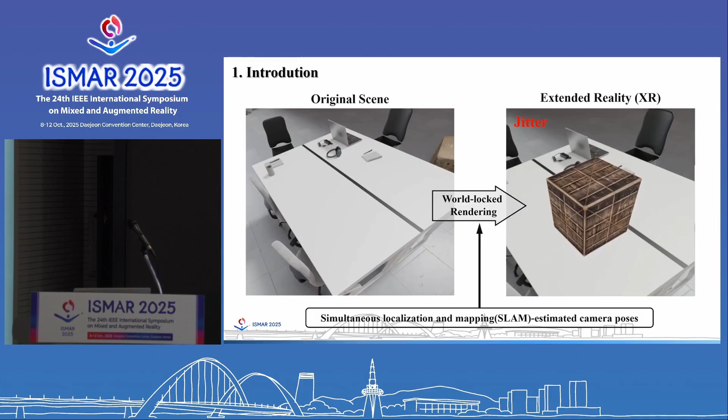Now, to achieve this, accurate 6-degree of freedom head pose estimation is essential. And in modern XR devices, this is typically done using SLAM algorithms. So here's a simple example. But when SLAM produces errors, the rendered content is directly affected. And actually, there are two typical types of noise. First, jitter, and second, drift. Both can noticeably reduce user comfort.

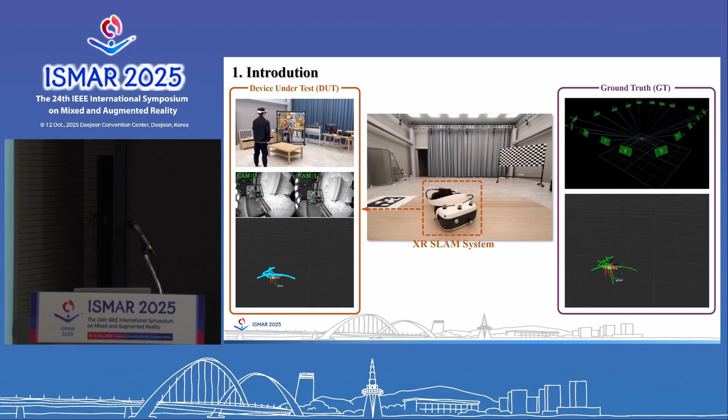So, to ensure a good user experience in XR systems, and also to provide a reliable way to compare and improve SLAM algorithms, benchmarking has become an increasingly important topic in this field. SLAM benchmarking usually involves comparing the trajectory estimated by the device under test, we often call it the DUT, with a high-precision ground truth trajectory.

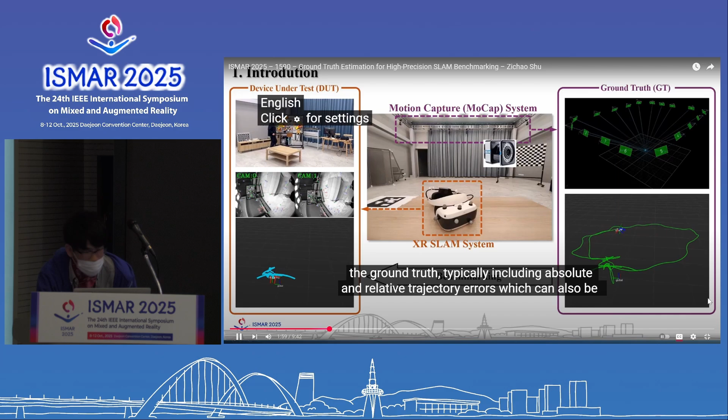And marker-based optical motion capture systems are commonly used to provide the ground truth, because they can deliver drift-free measurements. Then, error metrics are calculated by comparing the DUT trajectory with the ground truth, typically including absolute and relative trajectory errors, which can also be further decomposed into rotation and translation components.

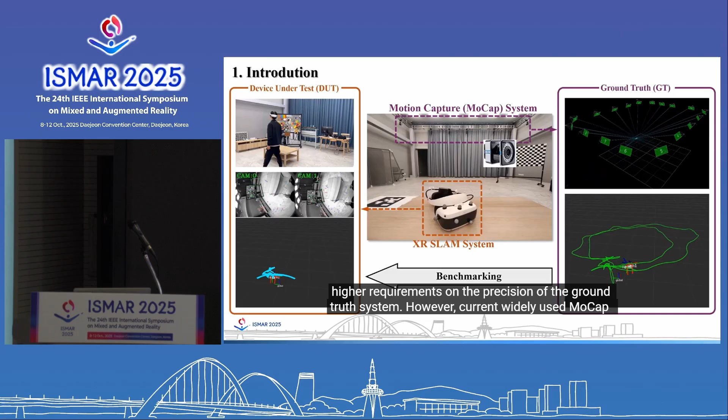Now, as XR devices demand increasingly higher immersion, the accuracy of SLAM has improved accordingly, which in turn places higher requirements on the precision of the ground truth system. However, current widely used mocap systems have, in fact, shown limitations in meeting these accuracy requirements. The accuracy of mocap is actually limited by two main factors.

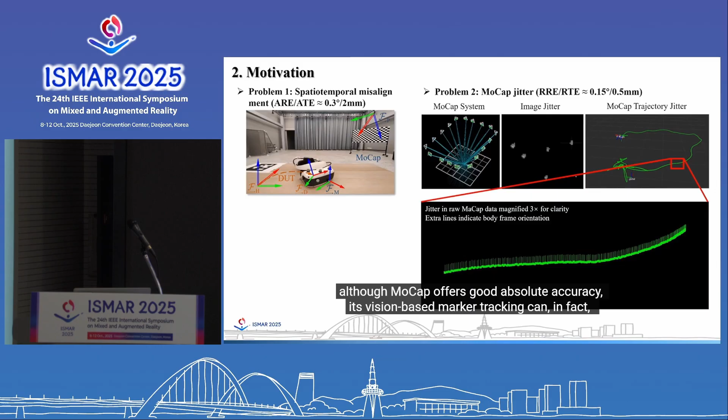First, the mocap system and the DUT use independent clocks and reference frames, so spatiotemporal calibration is necessary. And any error here directly introduces rotation and translation errors in the ground truth. Second, although mocap offers good absolute accuracy, its vision-based marker tracking can, in fact, be sensitive to unstable imaging or segmentation, which then causes high-frequency jitter.

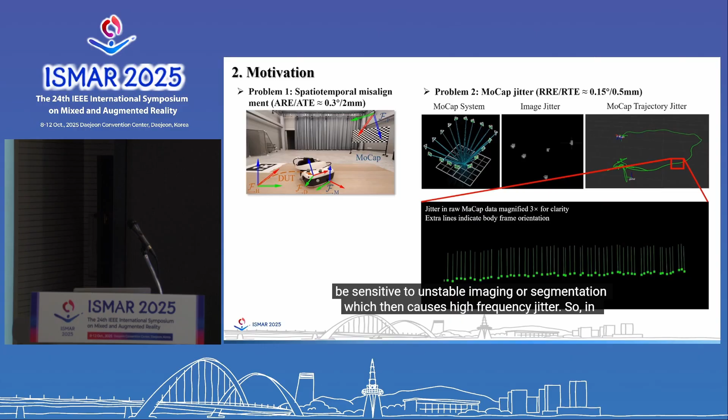So, in short, current mocap-based ground truth provides good translation accuracy, but it cannot accurately quantify rotation errors and interframe jitter. Now, these are often overlooked in other SLAM domains, but in XR they are really critical for user experience. And because of this, we often encounter a situation where two XR devices show very similar benchmark results in mocap-based testing, yet the actual user experience feels quite different. This mismatch is basically caused by the limited precision of the ground truth, leading to inaccurate evaluation.

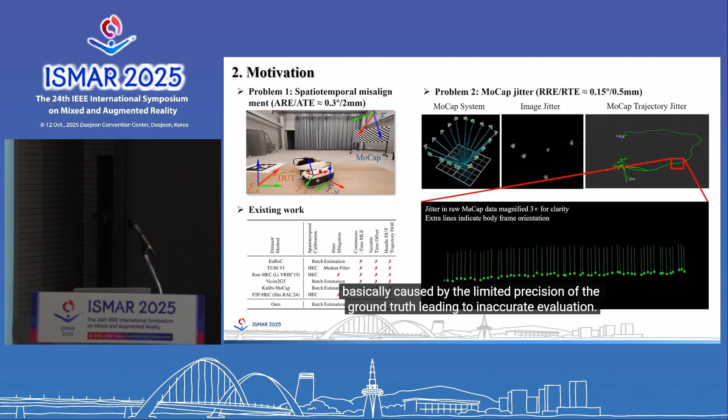Given the high accuracy of state-of-the-art SLAM systems, our goal is to generate mocap-based ground truth with at least half an order of magnitude lower error, covering both absolute and relative errors. So, to achieve this, we propose a method that introduces an auxiliary IMU to compensate for mocap jitter, and integrates mocap, IMU, and DUT data within an MLE framework. This enables efficient multi-sensor spatiotemporal calibration and produces a high-precision ground truth trajectory centered on the DUT. And to our knowledge, this is in fact the first method to achieve all these targets.

Now, here's the workflow. The inputs are raw mocap, auxiliary IMU, and DUT pose data. We first initialize the parameters, then build B-splines on manifolds for continuous time optimization. After batch estimation, the algorithm then outputs the spatiotemporal extrinsics and the DUT-centered ground truth trajectory. Finally, to further improve performance, we also introduce a variable time offset model for precise cross-device synchronization and a screw theory-based pose factor to ensure accuracy when processing DUT data with accumulated errors.

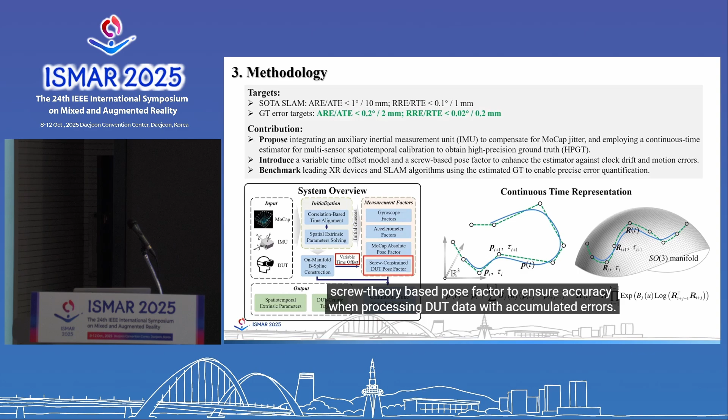Next, the top part shows the factor graph used in our continuous time batch estimation, and it basically illustrates how the states are constrained by sensor measurements. The bottom figure highlights a key reason why our algorithm achieves high-precision ground truth, the complementary mechanism between the IMU and the mocap.

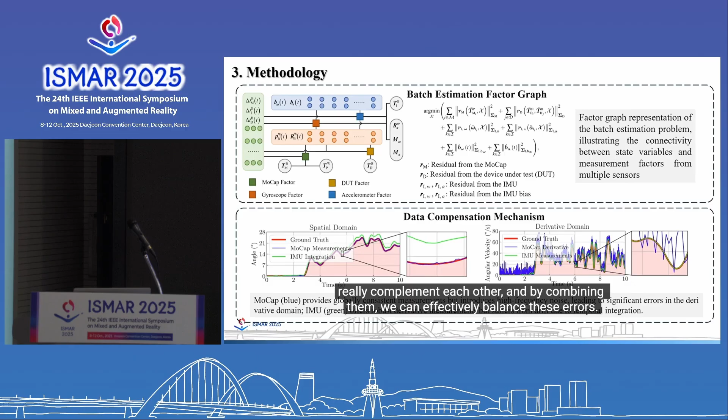Here, the blue curve shows mocap data, which provides globally consistent measurements, but introduces high-frequency noise, causing large errors in derivatives. On the other hand, the green curve shows the IMU, which gives robust derivative measurements, but of course drifts over time due to integration. So, as you can see, their characteristics really complement each other, and by combining them, we can effectively balance these errors.

We built a benchmarking system to validate our method. First, we visualized the trajectories before and after processing. And as you can see, the raw mocap data showed noticeable misalignment and jitter.

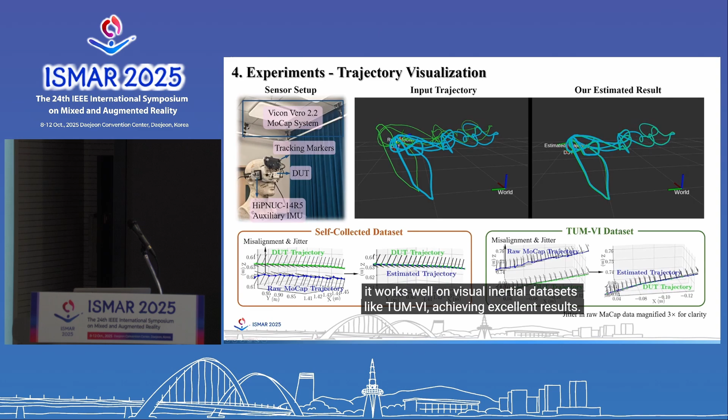But after optimization, our method produces smooth and well-aligned trajectories. What's more, our approach can also be applied to public datasets to generate high-precision ground truth. For example, it works well on visual inertial datasets like TUM-VI, achieving excellent results.

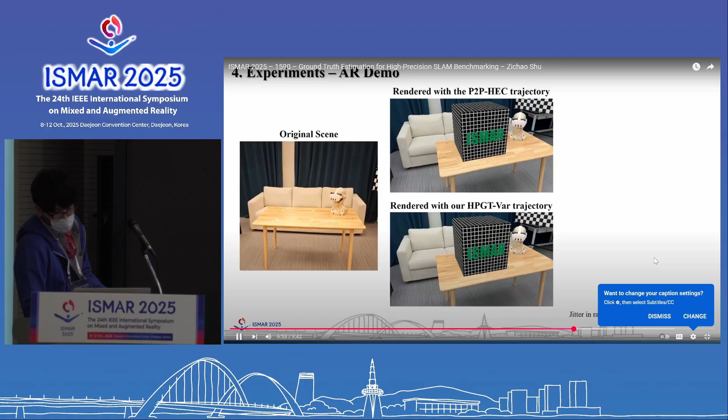To show the visual impact, we created an AR demo by rendering a virtual cube using ground truth from both a comparison method, P2P-HEC, and our method. With P2P-HEC, the cube shows noticeable high-frequency jitter because it doesn't effectively suppress mocap noise. Also, due to inaccurate calibration, the virtual object drifts when viewed from different angles.

In contrast, our method produces a stable cube that stays consistently aligned with the real world, giving a much better visual experience. We also conducted quantitative comparisons. First, we tested the calibration accuracy of the sensors, since this is a key factor that determines the precision of the ground truth. We repeated the calibration multiple times and computed the mean and standard deviation.

Finally, to show the practical value of our method, we benchmarked 3 commercial XR devices, Apple Vision Pro, Meta Quest 3, and Pico 4, along with the state-of-the-art open-source SLAM algorithm ORB-SLAM3. For this, we used ground truth trajectories generated by both P2P-HEC and our method. As you can see in the bottom table, inaccuracies in the ground truth can have a big impact on benchmarking results, especially for relative error metrics.

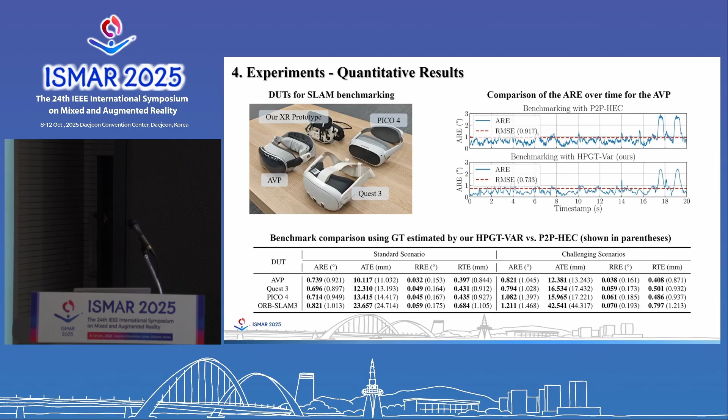Since many XR SLAM benchmarks still rely on P2P-HEC-like methods, this highlights a clear need for more accurate ground truth. Our method effectively addresses this by providing high-precision ground truth trajectories, paving the way for reliable benchmarking and supporting the future development of XR SLAM technology.

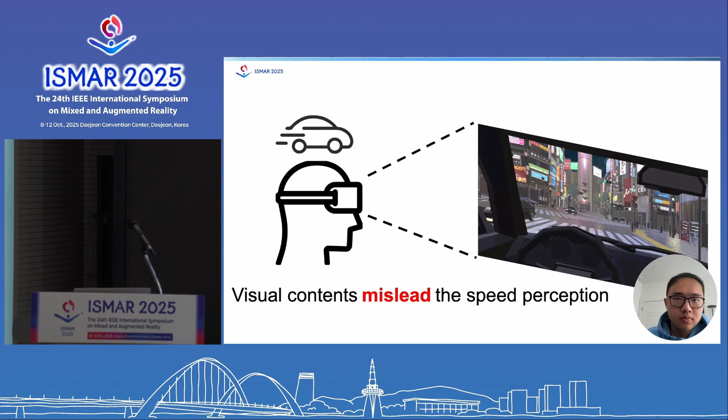However, since this sense of speed is triggered by the visual cues, the visuals can sometimes mislead our perception. To help you better understand this phenomenon of speed misperception, let's take a look at an example. Let's take a closer look at this driving scene, where the surroundings swiftly pass by us. And let's experience this with different visual content. Here comes the question. Which one of the motions do you perceive as faster?

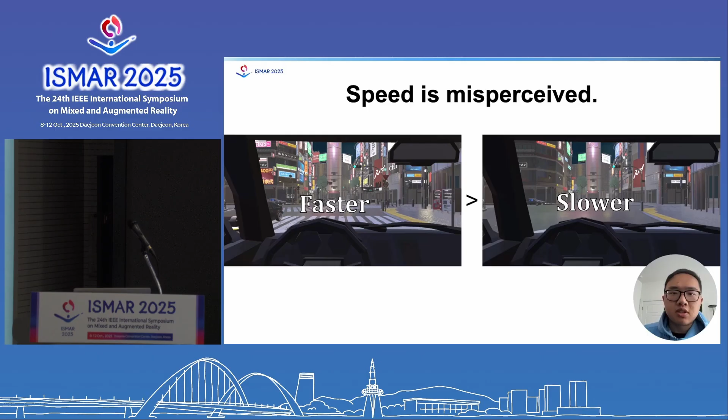Based on our user study, 90% of the participants found the first one to be faster. However, the truth is they are at the same speed. So we are wondering what factors in the visual stimuli are causing our speed misperception in VR and AR.

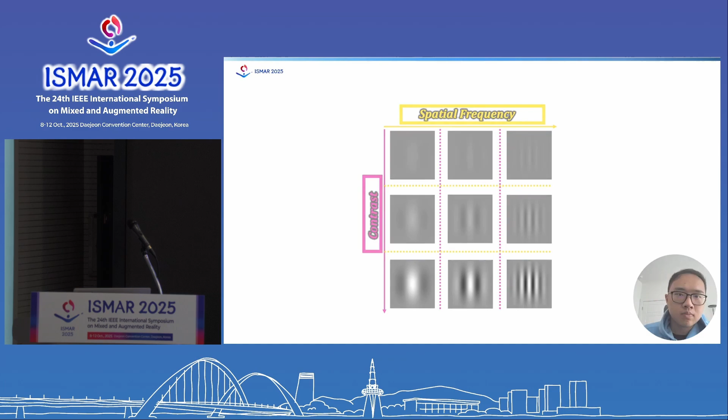To comprehensively understand how humans misperceive speed in visual content, we utilize Gabor patches as our visual stimuli, because their grating structure closely approximates the receptive fields of the neurons in our human visual cortex. In addition, we adjusted the contrast and the spatial frequency to investigate how these image features influence our speed perception. As an important factor in foveal and peripheral vision, we also examine the effect of eccentricity on speed perception.

Moreover, temporal frequency, which determines the velocity of the visual stimuli, plays a crucial role in this research. Overall, we investigate human speed perception across multiple dimensions, including contrast, spatial frequency, temporal frequency, and eccentricity.

Our study followed the method of adjustment protocol, where participants adjusted the speed of the center Gabor to match the speed of the peripheral Gabor to the best of their perception. After they completed the task, we measured the ratio of the speed between the peripheral Gabor and the center Gabor.

This allows us to calculate the ratio of the perceived speed to actual speed, revealing how users misperceive motion under the different visual conditions. We call it perceived speed ratio. Based on our data, we found that people tend to overestimate speed while viewing higher contrast stimuli. Moreover, this increase in perceived speed becomes more pronounced as the spatial frequency increases.

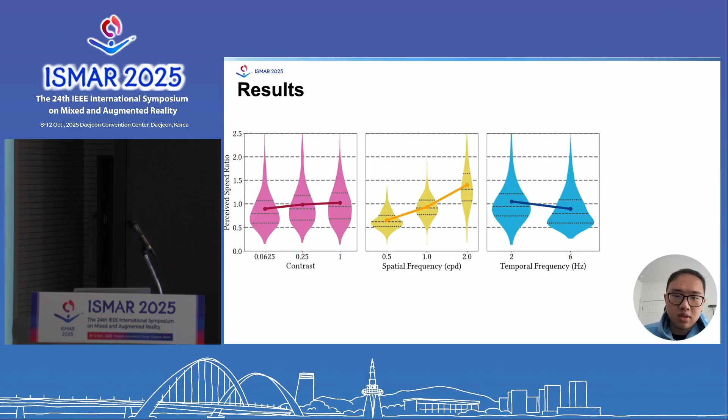However, we observed that the perceived speed ratio decreased with the higher temporal frequency. And similar to the temporal frequency, the effect of the eccentricity on speed perception is significant. The eccentricity reduces perceived speed. Our study provides a systematic understanding of the visual-induced speed perception. Moving forward, we aim to evaluate these effects in more general and complex VR environments.

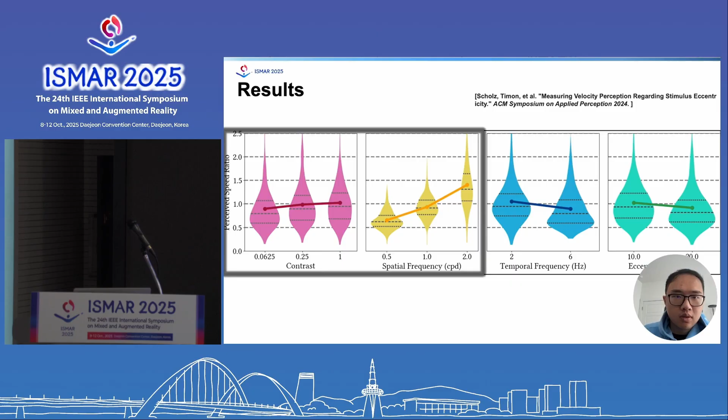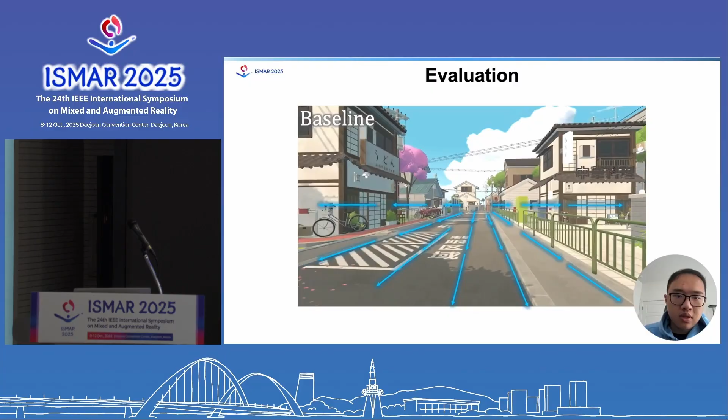While prior work has investigated the combined effects of the temporal frequency and eccentricity in the VR settings, the stronger effects of the spatial frequency than contrast on speed perception have remained underexplored. So we aim to address this by testing our findings in realistic scenarios. To differentiate with the pilot study and pursue a more generalizable situation, we designed the study in natural VR scenes. As shown, the user experienced a daily walking situation in this study.

For the spatial frequency condition, because spatial frequency, being an inherent property of the scene content influenced by the object distribution, texture, and lighting, could not be directly and precisely controlled through post-processing filters, we adjusted the spatial frequency by selectively retaining or removing the high-frequency objects from the field of view. And the users sequentially experience the scenes with different spatial frequencies.

For the contrast condition, we implemented a camera filter to control the overall scene contrast. As illustrated, users also experience the scenes with the varied contrast. The evaluation study conducted a two-interval forced choice task, letting the user differentiate the speed variance between the baseline scene and the adjusted low spatial frequency or the low contrast scene.

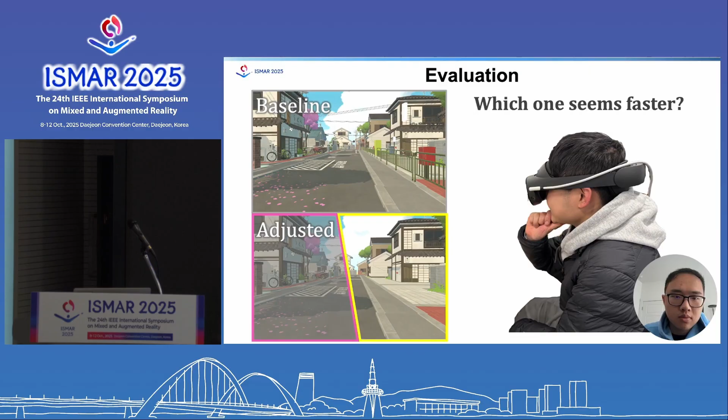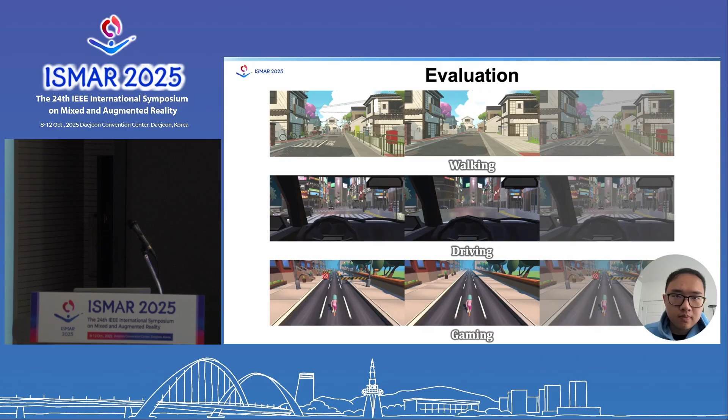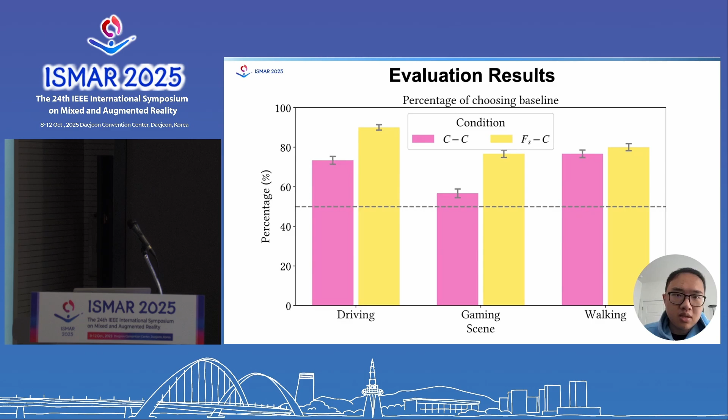Our study spans 3 immersive scenarios in VR, including walking, driving, and gaming. The statistically significant results indicate that the participants consistently misperceived the speed as slower in lower frequency and lower contrast scenes. Our experiments confirm that visual content significantly influences perceived speed, demonstrating its generalizability to immersive VR environments.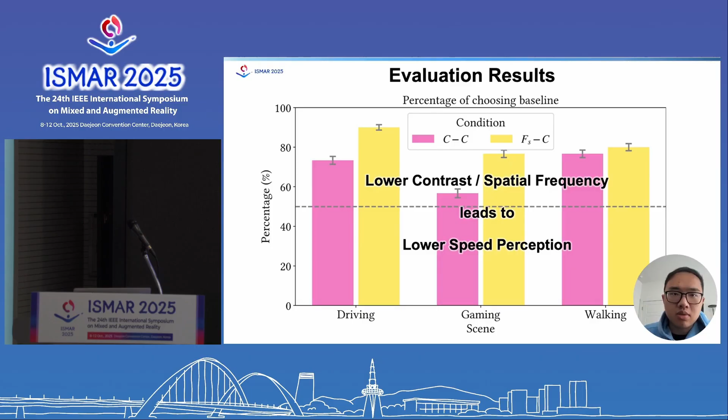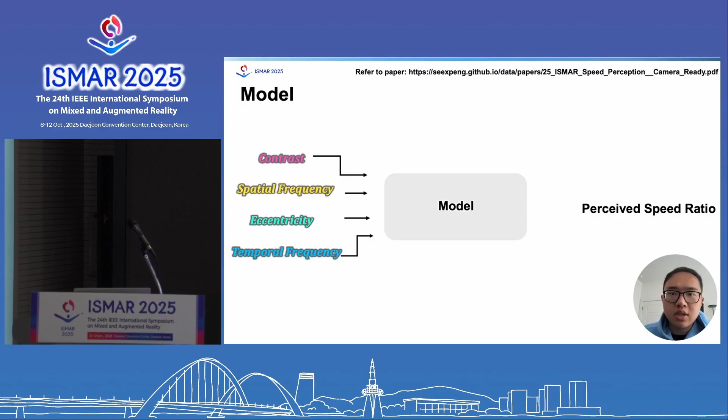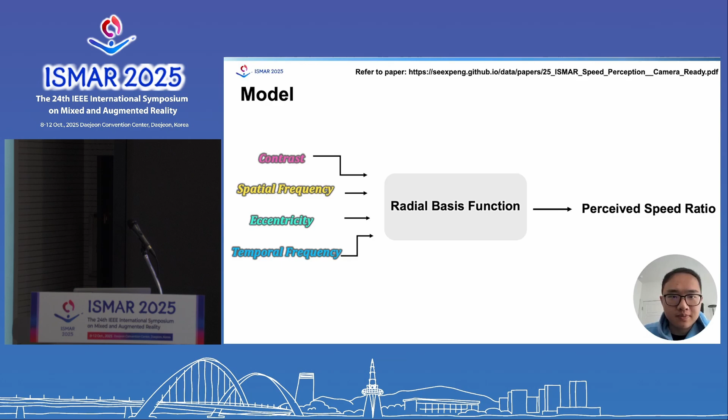This has encouraged us to develop a generalizable model to predict the perceived speed ratio, considering the various visual conditions, including contrast, spatial frequency, temporal frequency, and eccentricity. To model the multi-dimensional relationships while encouraging the local smoothness, we selected the radial basis function neural network. For the details of this neural network, please refer to our paper. Therefore, our model can predict the speed perception in different contrast, spatial frequency, temporal frequency, and eccentricities.

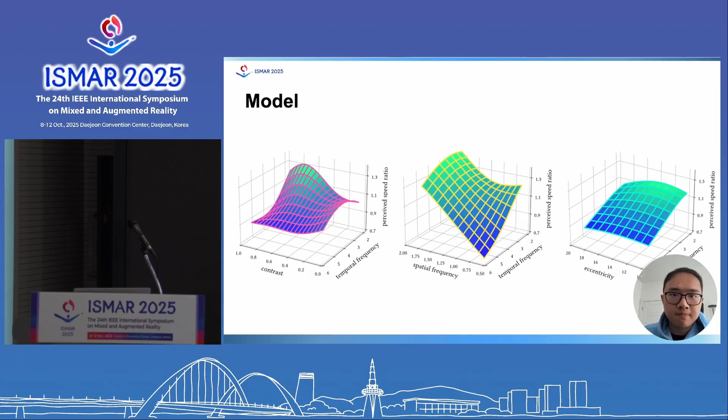The proposed model drives us to a couple of potential applications. Firstly, as a VR user, when viewing a dynamic scene, the visual-vestibular conflicts may result in cybersickness, making us feel dizzy. To address this issue, we could utilize our model and adjust the visual cues to decrease the perceived speed. This approach could potentially compensate the visual-vestibular conflict.

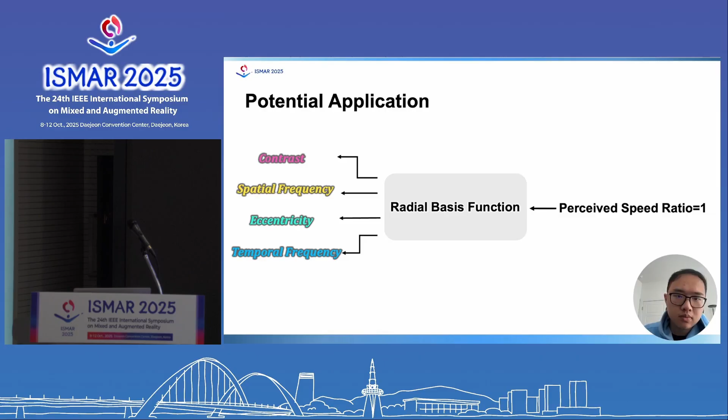Other than using our model for post-hoc scene analysis, we could also use it for scene synthesis. Setting the perceived speed ratio as 1, we can inversely apply our model, and it will tell us in what size of the visual properties we can synthesize our scene to reduce the speed misperception. By knowing the size of the image features with minimum speed misperception, we can synthesize the scene with a certain size of the visual properties, and it could deliver VR with corrected speed perception.

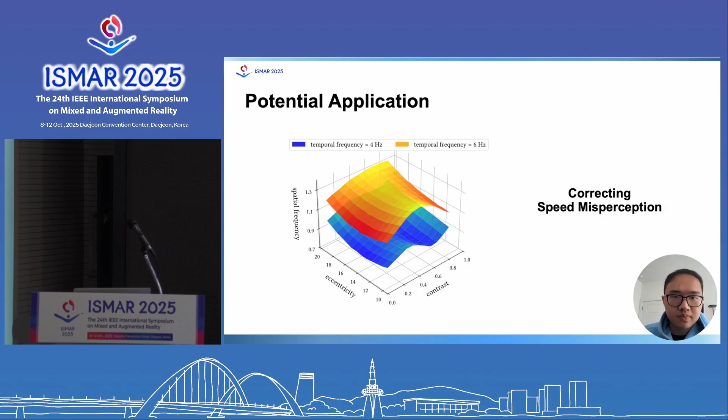We propose a perceptually guided framework for speed perception prediction under various visual properties, and demonstrated 2 potential applications. We believe this work leaves many fascinating future directions to explore. For instance, with additional factors, we envision our model can be supplemented as a perceptual metric to enhance our understanding of speed perception. In addition, a natural next step would be to extend our model into human-in-the-loop applications, such as evaluating interactive task performance or enhancing navigation guidance.

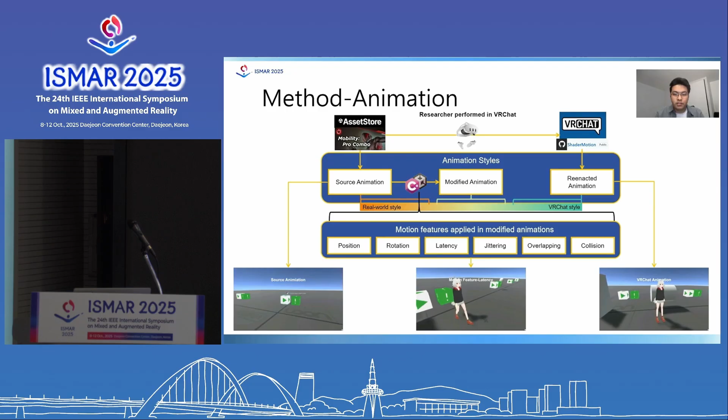The reenacted animations were performed by the experimenter, who mimicked the source animation inside VRChat using a Meta Quest 3 headset and controllers. The modified animations were made by taking the source animation and adding common imperfections found in VRChat, which we call motion features. Each motion feature was identified by the experimenter and manually implemented in Unity. The video clip shown in the middle is only one of the 6 motion features.

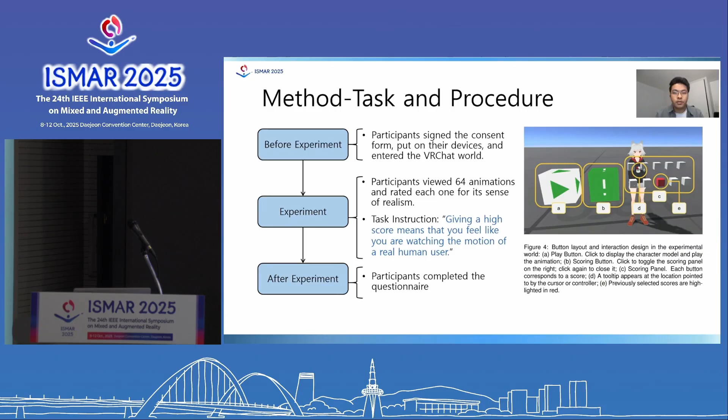After completing all ratings, participants filled out a questionnaire about their criteria for judging realism and anything they found to be unusual. After collecting the data, we move on to the analysis stage. Our experiment aimed to test 3 main hypotheses. First, participants with less VRChat experience will rate animations with different criteria than participants with more VRChat experience. Second, participants with more VRChat experience will rate reenacted animation to be more realistic than source animation. Third, modifying source animations with motion features simulating VRChat errors will increase the realism of the animations for experienced VRChat users.

We collected valid data from 37 participants and divided them in 2 ways. First, by usage, which simply compared users with and without VRChat experience. And second, by experience level, which categorized participants into 3 groups. Low experience, which means 0 to 10 hours of playtime. Medium experience, which means 10 to 500 hours of playtime. And high experience, which means more than 500 hours of playtime.

Our results are divided into 3 parts. First is usage on realism criteria. We compared the users and non-users on the source and the reenacted animation styles. A clear interaction appeared. Non-users rated the motion capture source animation higher, while users rated the VRChat style reenacted animations higher. However, the difference among the users group alone was not significant, so H2 was not supported at this stage. Questionnaire responses show that non-users emphasize smoothness and physical realism, whereas users focus on whether the motion was achievable inside VRChat, reflecting how platform experience shaped their sense of realism.

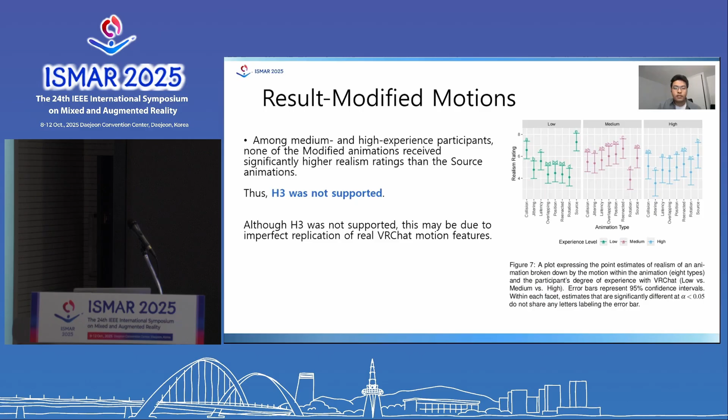In summary, both having and accumulating VRChat experience strongly affect how users judge the realism of avatar animations. Realism is not fixed or purely about matching reality. It depends on users' platform experience. This suggests that matching reality is not the only path to realism, and developers can shape users' sense of realism through consistent design, giving creators more freedom to define their own visual style and culture in virtual worlds.

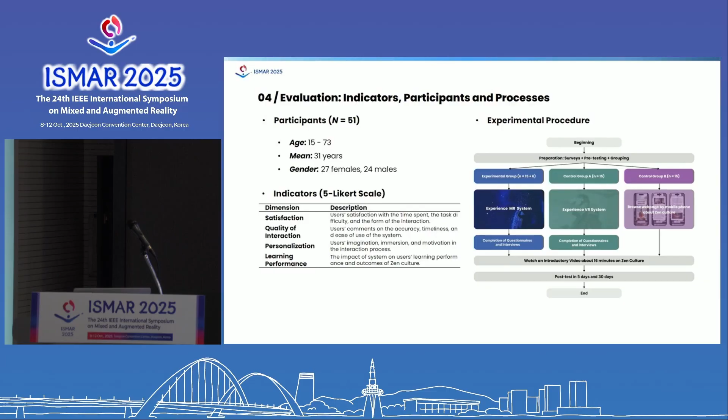A brief report on the user study is given below. Our controlled evaluation with 51 participants compared three conditions: our MR system, a VR implementation, and traditional mobile web content. We evaluated user experience dimensions such as satisfaction, interaction quality, and personalization, and also measured their learning performance.

For user satisfaction, our MR system significantly outperformed VR in interaction task satisfaction and interaction form preference. Participants appreciated the natural, hardware-free interaction, with many noting that VR controllers created learning barriers and detracted from the meditative experience. Regarding immersion and engagement, MR scored significantly higher than VR. Participants reported feeling more present and connected to the experience.

One participant beautifully described the scenario transitions as like a human lifetime, while others interpreted the flowing elements as time passing by or inner consciousness. Importantly, our system demonstrated superior learning outcomes. Knowledge retention tests at 5 and 30 days post-experience showed significant advantages for both MR and VR over traditional web content, with MR maintaining slight advantages over VR in long-term retention.

Qualitative feedback indicates that multisensory elements, particularly the scent of sandalwood, along with embodied behavioral participation, such as walking meditation and hands-together gestures, create an authentic meditative experience that strengthens connections to Zen culture. From our findings, we propose 5 transferable design principles for abstract ICH digitization.